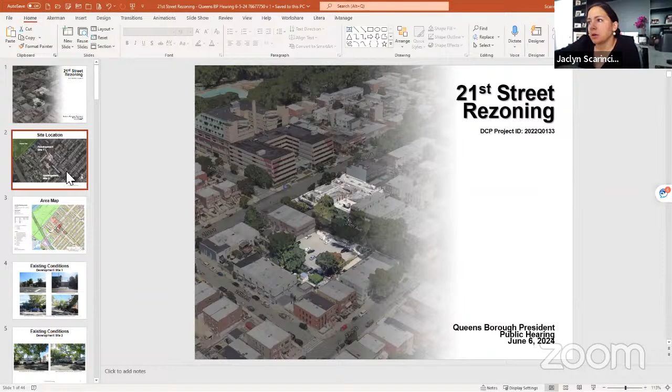The mandatory inclusionary housing component here is proposed to be a condominium for-sale unit, and we'll get into more of that within the presentation. Just to orient you to the site, there are two development sites within the rezoning proposal. The first is located along 21st Street, that's the Ricardo site. The second is located on 24th Avenue, and that's the current open parking lot.

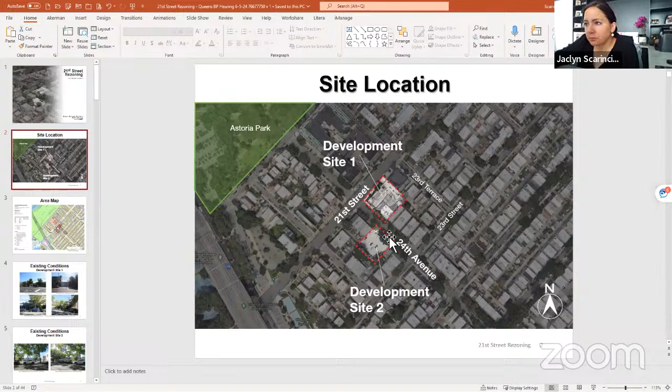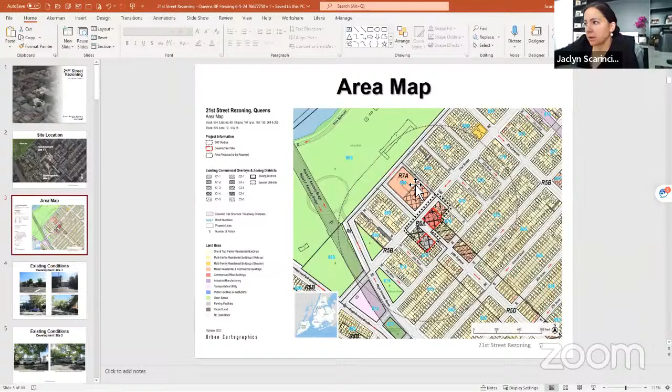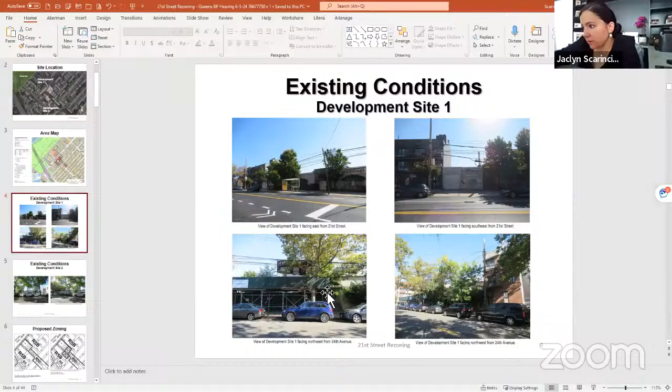This is the development site 2 along 24th Avenue.

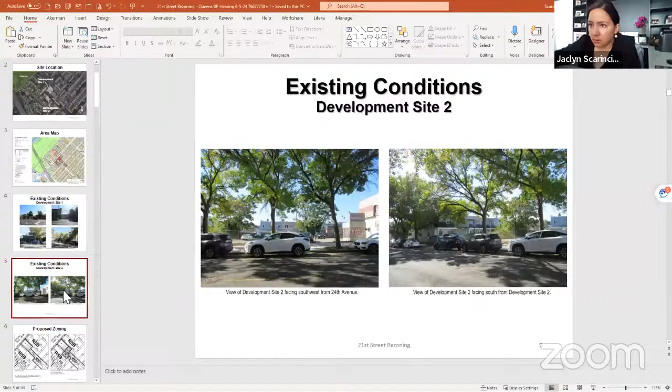Getting into the proposed zoning change in the land use section before you today: the existing zoning is R5B on 24th Avenue, and on 21st it's split between R5D/C1-3 and R5B. We're proposing an R6A/C1-4 across the entire rezoning area, which encompasses both development sites and goes up to 21st Street, and across 21st Street over to 23rd Terrace.

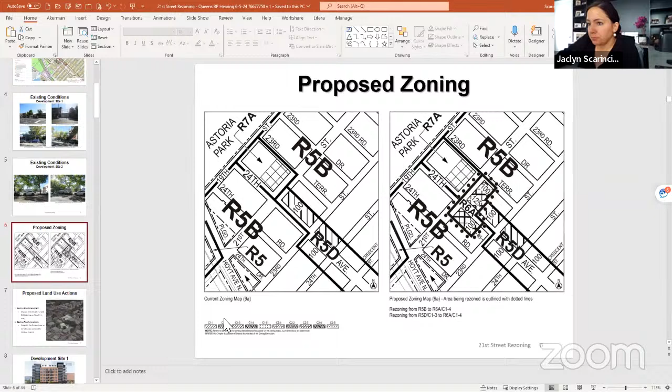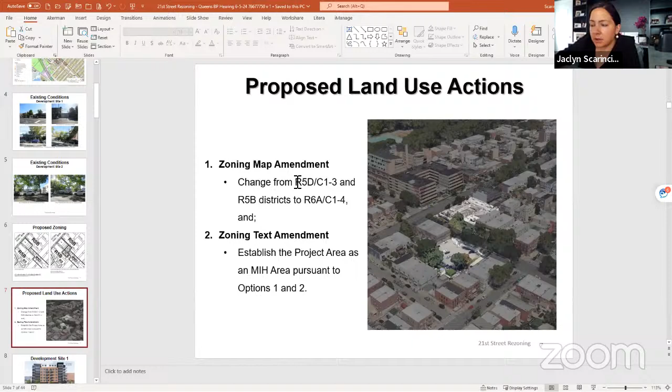The proposed land use actions are a zoning map amendment to change the existing R5D/C1-3 and R5B districts to an R6A/C1-4, and a zoning text amendment to establish the project area as a mandatory inclusionary housing area. We are mapping both options 1 and 2.

Development site 2 will have 35,344 square feet of residential floor area, 38 dwelling units, including 12 permanently affordable home ownership units pursuant to MIH option 2, 18 accessory parking spaces, and 7,997 square feet of local retail.

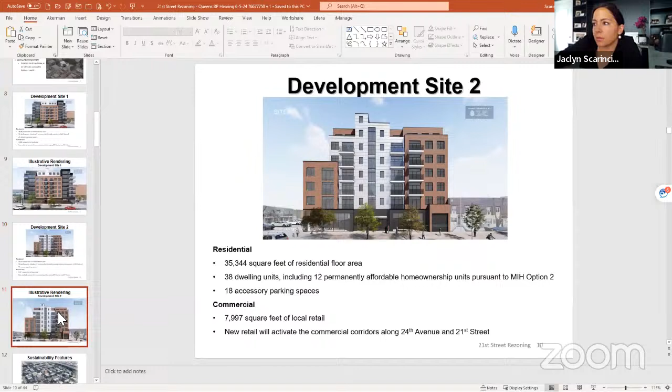Here's another rendering of development site 2.

The sustainability features for this site include solar ready roofs, energy and sound efficient windows, Energy Star appliances, and energy efficient mechanical equipment. For water efficiency, we're using stormwater runoff for irrigation for planting areas. We'll also use porous pavement where possible to minimize stormwater runoff and maximize stormwater infiltration, and have low flow plumbing fixtures throughout the buildings.

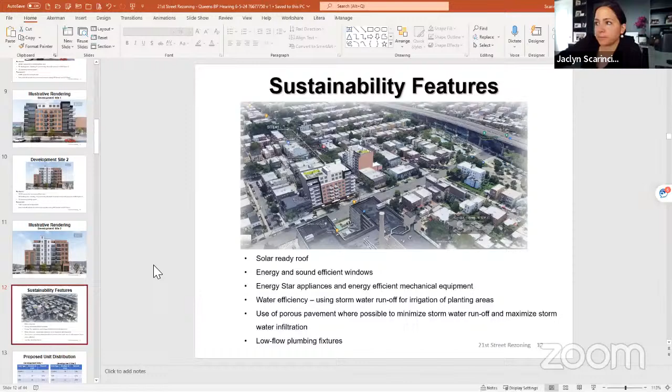The proposed unit distribution for both buildings is here. We were able to balance the mix of smaller studios and 1-bedrooms with more family size units, 2 and 3 bedroom units. On development site 1, we're at over 50% 2 and 3 bedrooms, and development site 2 is pretty close to 50% as well.

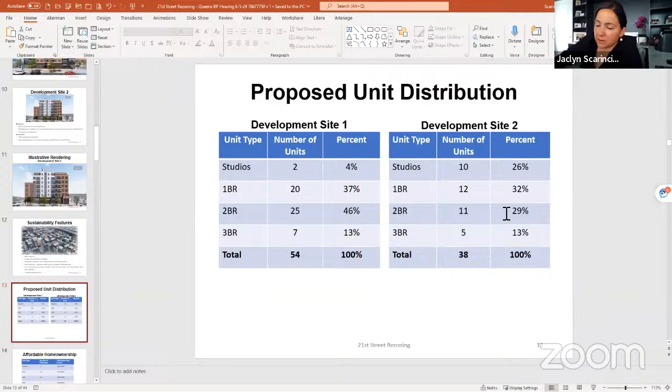The affordable home ownership - this gives you a look at the sales prices for the studios, 1, 2, and 3 bedrooms. A studio at 80% AMI is $225,000, 1 bedroom is $270,000, a 2-bedroom is $315,000, and a 3-bedroom is $330,000. The affordable sales prices are calculated based on HPD's formula, which assumes that a homeowner pays no more than 30% of their income - including common area charges, mortgage payment, and utilities - so that a homeowner is not paying any more than 30% of their income on their housing.

And with that, I'll open it up to questions.

We were pleased to get approval from CB1 two weeks ago, and overall I think everyone was really excited to hear that the project has affordable home ownership within the project, that we are proposing to bring back commercial use to the corridor, and also that we are proposing some parking, because I think there's a need for accessory parking within this community district.

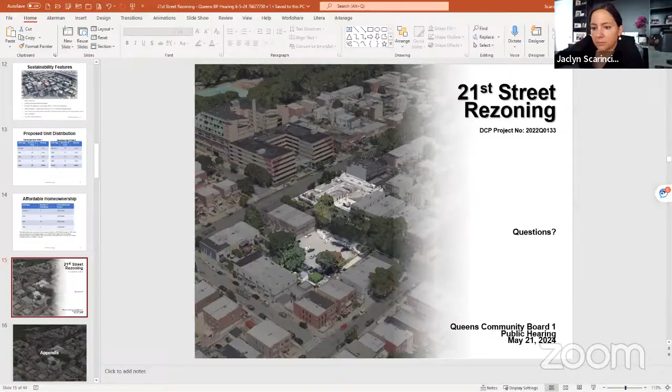Thank you, Jaclyn. Question about the parking - was that raised at the community board level? Because I know there's often a consideration for additional parking from the board. Was there any concerns?

No, it actually wasn't really raised at all. I think it was just part of the development proposal because there was a recognition that there is a need for some parking within Astoria, and I think even now there's a need for parking within the surrounding community. Okay, and is there a LEED standard that you're seeking on this project?

I don't know - we can get back to you on whether they're going to seek LEED. I think the sustainability features they're proposing are all going to meet and hopefully exceed Local Law 97, but I don't think at this point they've targeted a certain LEED certification level for the project.

Okay. I'm going to defer to the planning staff - are there any speakers on this item? There's no speakers on this item.

Okay, thank you. With that, I thank you for your presentation, and I think this item is closed.